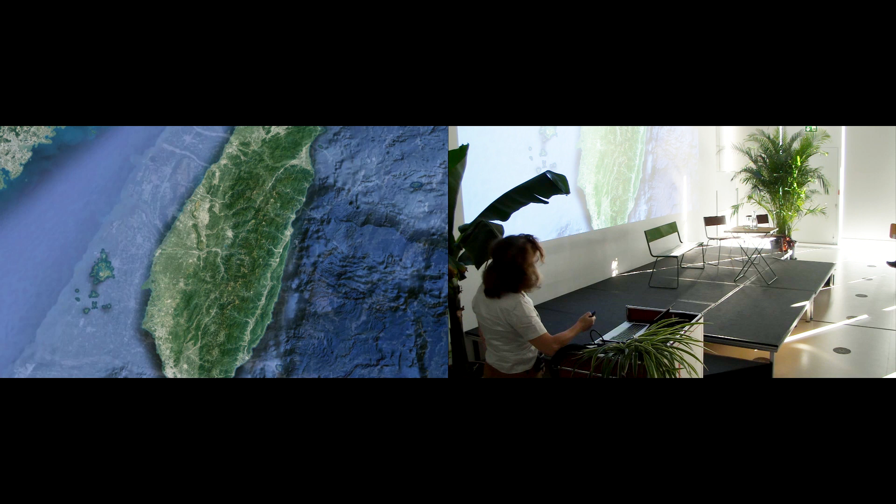That's the stage for a few months, and that's what happened when it's heavy rain, typhoon, in construction stage - everyone is stressed, everyone is anxious. What happened? What can we do? And that happens regularly, every few months.

Our goal with lithosphere design and atmosphere design is to work with such kind of event and to make it adjust, including in regular life, urban life, so that it's not a drama, that it's just what happens and we need to live with it.

As another point, the rain, the clouds crossing the mountains, and a lot of pebbles coming from the volcanic works - you see 100% dry soil without nutriment, without foods, and just the place we need to develop a life process. So not evident to engage a life process.

By sure, we use the elements we are dealing with, meaning rain, stones, by just engaging some comfortable places and resorts. It was requested in the brief.

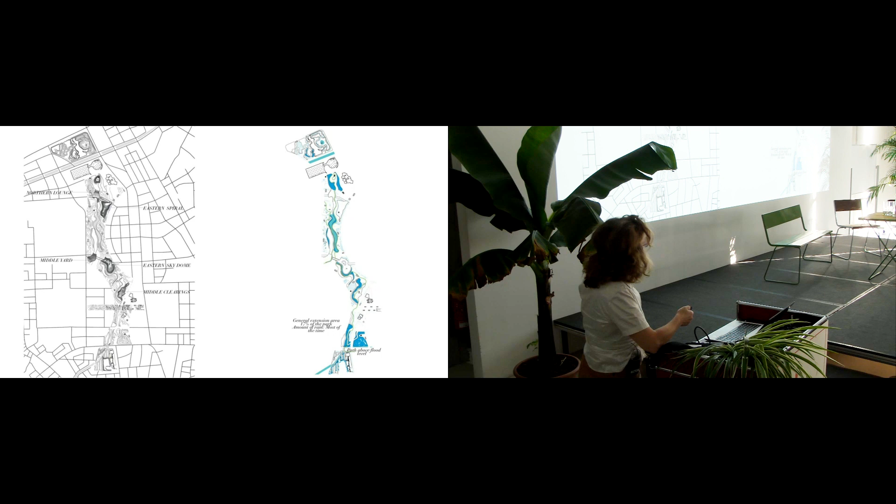On the right side, you have the different water events. In regular time, just part of it is full of water. When it's exceptional, even 25% of the park is full of water. And when it's really, really exceptional, it's 80% of the park full of water.

I hope I will see what happens when the park is finished, because it's like a path above flood level going through ocean in the heart of a city center.

You see that all districts are linked to the park by catching that water, cleaning it with phytoremediation beds, and making direct infiltration in the topographic beds.

In tropical humid climates, engineers are used to pushing away the water to the sea very quickly, which is really bad, because before they had mountains with a lot of forest, and the forest and the trees caught the water and made infiltration. But since they made economic profit with the trees, there's no more forest on the mountains, and they push the water very quickly away to sea level.

So there's no more rainwater going into the water table, and in a few decades it's no longer safe water to drink. So that drama is as dramatic as it sounds.

I had a lot of struggle with the engineers, because they were always used to pushing the water away, and I said, no, please, you need to keep the water on place and infiltrate it where it falls down, not push it away. So that was typically the way we engaged the design process for that park.

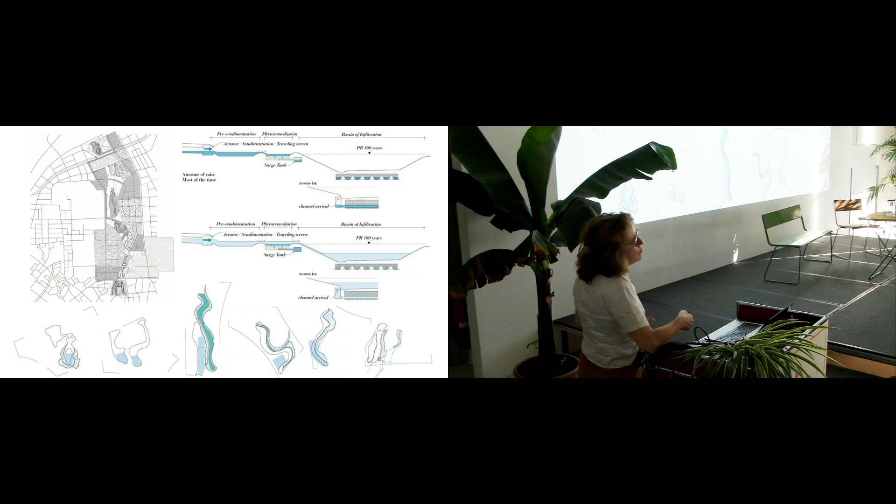That park is linked nearby to all districts, the further district, because at that time there was nothing - just roads, and it was just ready to engage a construction process.

That is the trees linked to the way we engage different resorts. Atmosphere design, much more developed by Philippe Rahm, means once we had done the lithosphere design, it was mounds and topographic beds.

Transsolar did a simulation by testing where the wind is faster, where the shadow is more dense, linked to the further skyline.

We engaged at that time 3 different resorts: some much more in shadow for leisure lands, some much further away from the traffic for less polluted lands for the child play lands, and some much further away from the humidity of the ponds and topographic beds, more linked to the sport lands, where it's a little bit less humid.

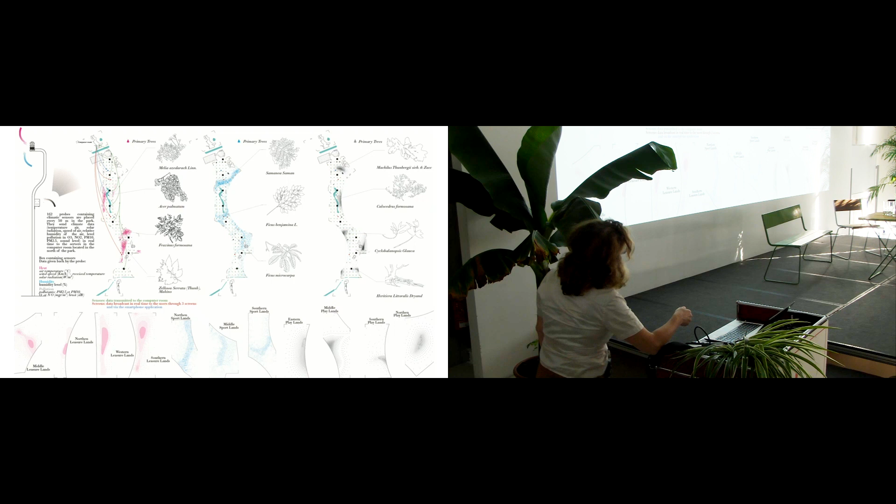We engaged that program linked with specific species of trees who absorb more or less the air, or with large leaves to make more shadow, or with trees transforming the pollution of the air.

On the same time, in addition with those 3 resorts, we try to find links with specific new districts for residential district, financial district, and a large promenade for 400 meters linking university campus to high technology campus. This means all the design process is deeply linked to very specific technical tools and to the way the future inhabitants can invest such kind of area.

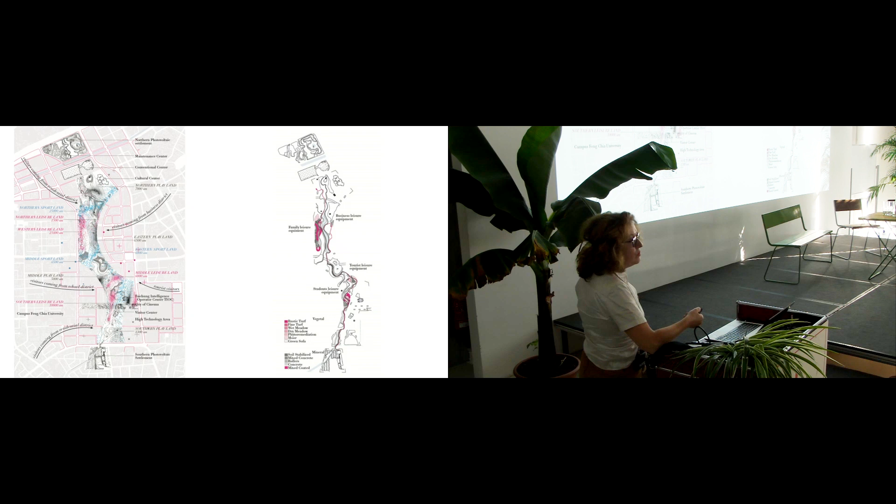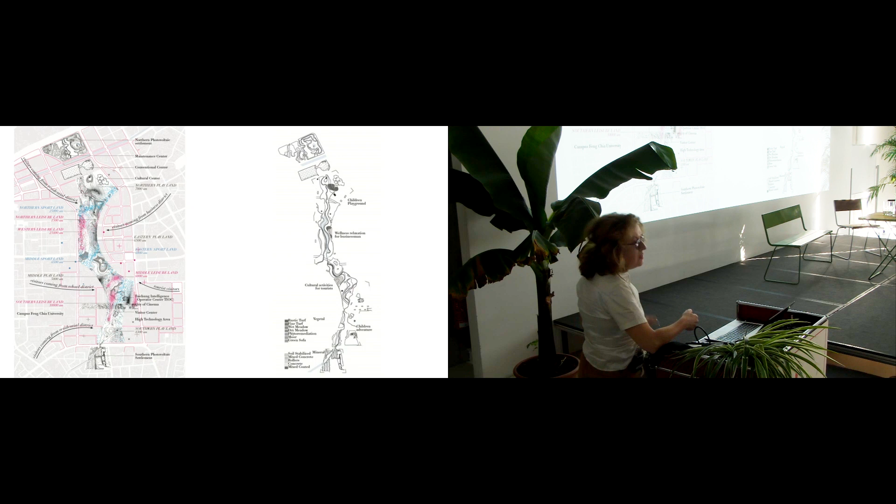Linked to the trees, the specific trees, you have a large range of soil finition, more or less porous, more or less smooth, more or less mineral or vegetal, so that in that large area, you have different scales of gardens appropriate to the specific behavior.

Such kind of program, suppose that you are drawing the park very, very precisely, which is not usual, because in general, when you have a large scale, 70 hectares or more, mostly you find just lawn, water, some furniture.

And here, for example, the phytoremediation strata, you see here, the planting, each species is defined 30 centimeters by 30 centimeters. So that makes the company quite a little bit crazy because they are not used to play with landscape at that scale.

You can see that the leisure lands are much more linked to a grid of trees with large leaves, and the sport land is much more linked to random trees with a kind of ficus that has aerial roots absorbing the humidity and just transporting the humidity from the outside under the roots.

I speak about the specific promenade from east to west. You can see all that line is approximately 4 kilometers of drainage system, and the black points are manholes, so that you can always be under control about the emptiness of the drainage, so that when the rain arrives, it works to infiltrate it directly on the place.

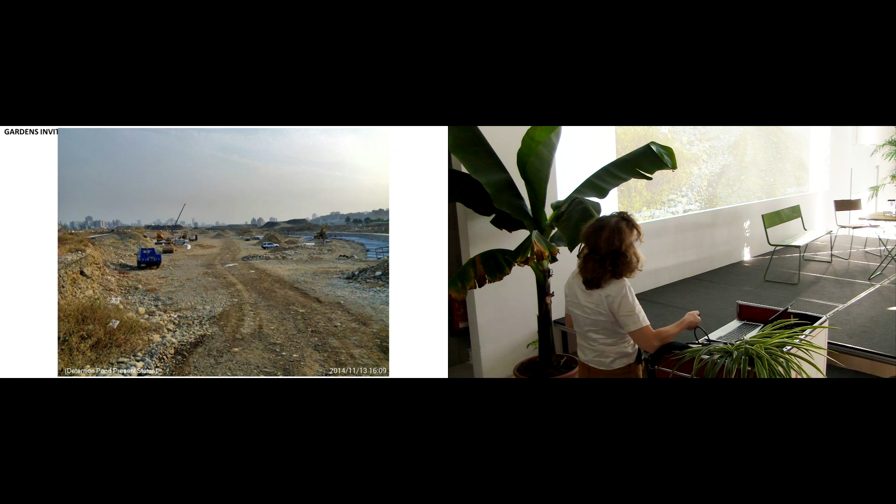Then with the lithosphere design, you have the large mounds, transforming the pebble on place, because the cut and fill needs to be on place. You can see that we had a lot of mounds of pebble that needed to be transformed into hills, and the topographic beds. I like to show the construction stages, because the way you engage the construction defines very precisely the way you get the result of the life afterward.

It's not only to show the render and what you want to get at the final point, because it's never a final point. It's always a life process transforming at each stage.

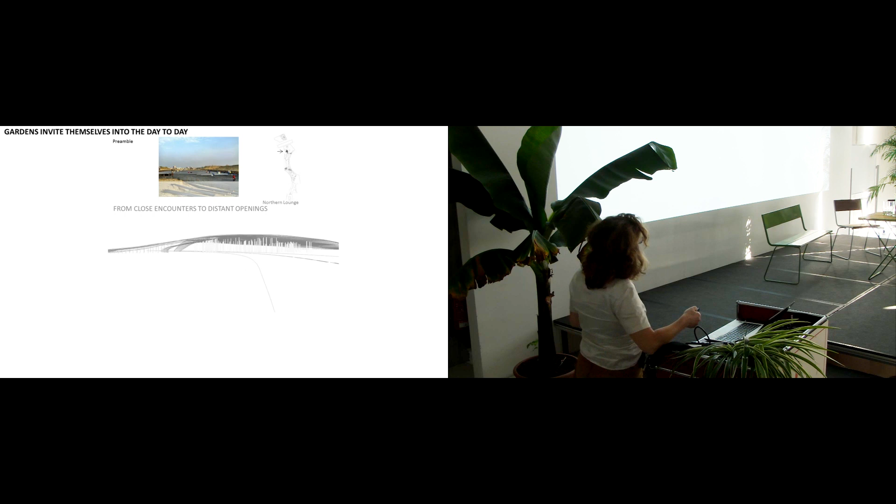That's a structure under the hills which makes the continuity from north to south and introduces a shelter over. You have continuity of landscape and species, animals, and human continuity. And under the shelter, you have protection against heavy, sunny places.

So in each case, for us, landscape design has always to engage many programs, not only one way to invest a place. That's under the shelter. It's a size about 2 hectares, so it means you have a very good sound reflection and it can be transformed at night or at specific events like a nightclubbing or a music theater or parties for the inhabitants.

As we struggle a lot, the traffic roads become a shared space with only 20 kilometers per hour, so the pedestrian can cross everywhere, the curb and share the space, and not only have traffic cutting the continuity of the park.

You can see that it was not a subject to make bridges and tunnels. We don't care, we are landscapers, we are not architects nor engineers. And you can see the way to draw and to engage the continuity is to let open lines to make the continuities from north to south.

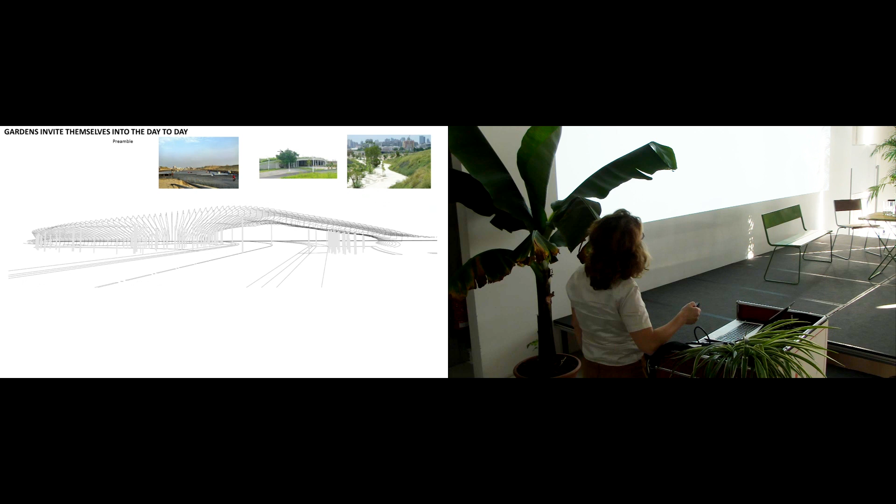So the middle yard, that was not the usual way for the engineer to calculate the structure, and they were not so happy with me. But anyway, we do it. At the beginning, we didn't want to have columns.

We wanted to use the earthwork with the pebbles like a foam system. And they asked, okay, please go back to much more traditional structural design. And the only way I found to dissolve the columns, because I'm not an architect, I'm a landscaper, is to introduce different scales of diameter so that it's a continuity between the canopy outside the trunks of the trees and the canopy inside the shelter.

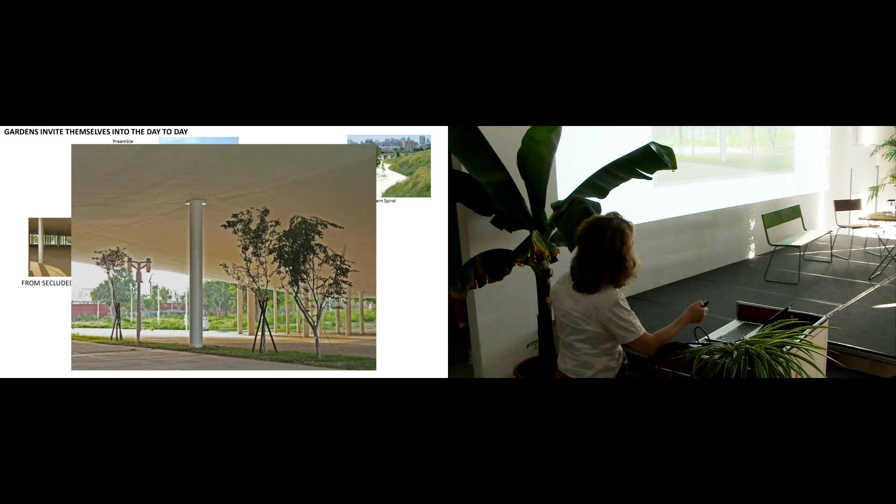Eastern Sky Dome is one very important large piece. It really looks like a mountain, but it's just an artificial build-up. I'll go fast.

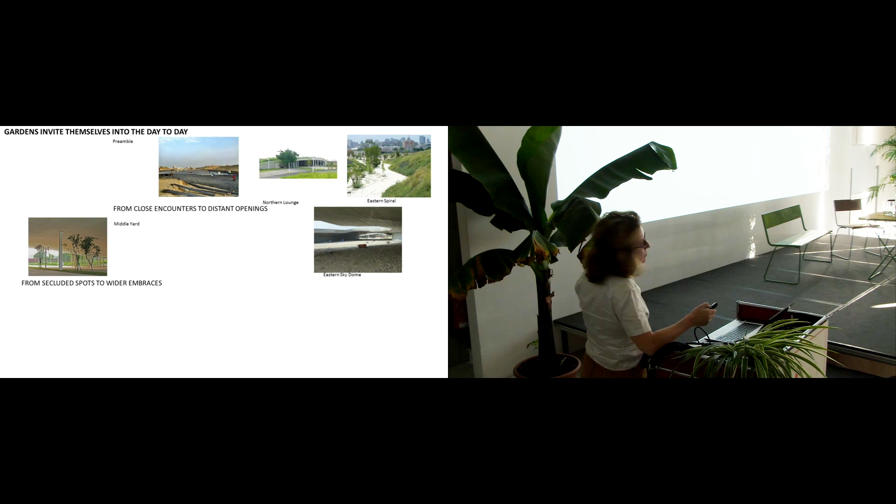All that design strategy embedded the places for cultural facilities, especially the cultural center with SANAA and the latest Taiwan Tower.

I really think it's very important to show the stages of construction, because you understand how it's built up and what is behind the final scheme.

For me, it looks like an acupuncture of the skin of the future park, and what it lays open at system to evolve, because you have many different ways to work the vertical section and the horizontal development from north to south. By the way, you will never see that anymore because it will be full of foliage and trees.

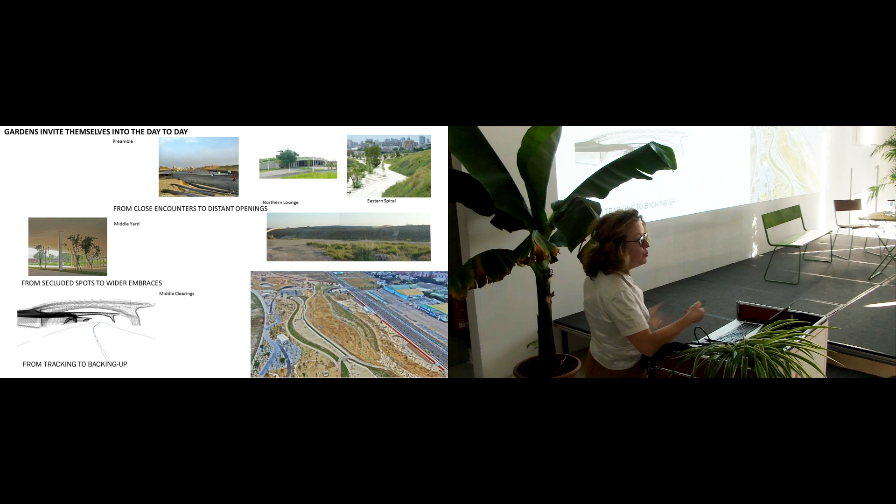So that's the reason you have much more in the future life a horizontal point of view, and here it shows the different elements we push together to introduce a biologic life.

That's today. You have a field of photovoltaic bringing independently the whole lighting of the whole park.

That place was not expected as an exceptional place because they asked us to put 450 places of parking north and south. Just to show that even with a program like 450 parking spots, it's always the way you play with, you draw with, that makes it landscape or not landscape, or just a parking lot like a shopping mall.

That's the situation today. So you can see the photovoltaic field, installation linked to Rudolf Steiner, 12 suns, like a movement.

But in between, you will have in the future years a convention center. So that kind of vision, it's just the construction situation.

It was a continuity of soil overlapping, but on the same level, at the field level, through pavilions for different activities like pedagogic activities for children, or for sport, or for yoga, or such kinds of things.

You can see that we were very lucky to transplant more than 1,500 existing trees like ficus, and that makes the park immediately show different ages of life evolution, with baby trees and really much older trees.